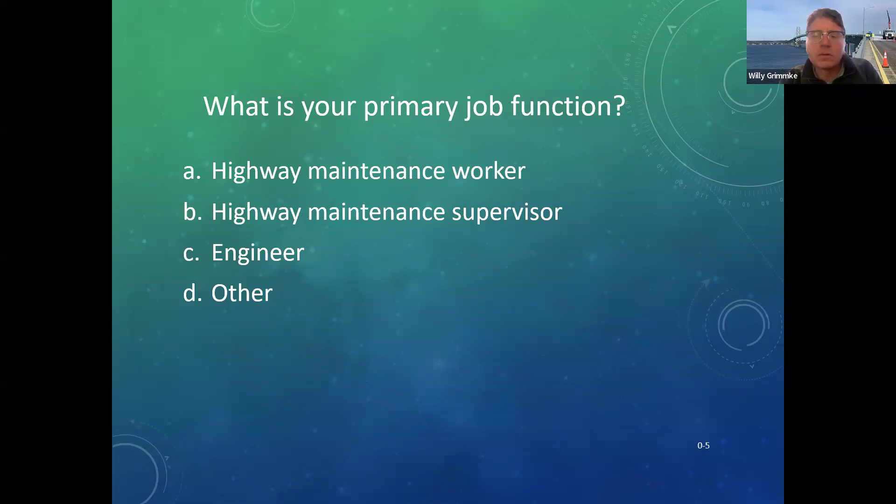So for the under 3 to 5 years folks, there may be something new that you'll learn. And for the people that are in the 11 to 20 range, you may have stuff that you can share with me that I haven't seen. Okay, we'll close that.

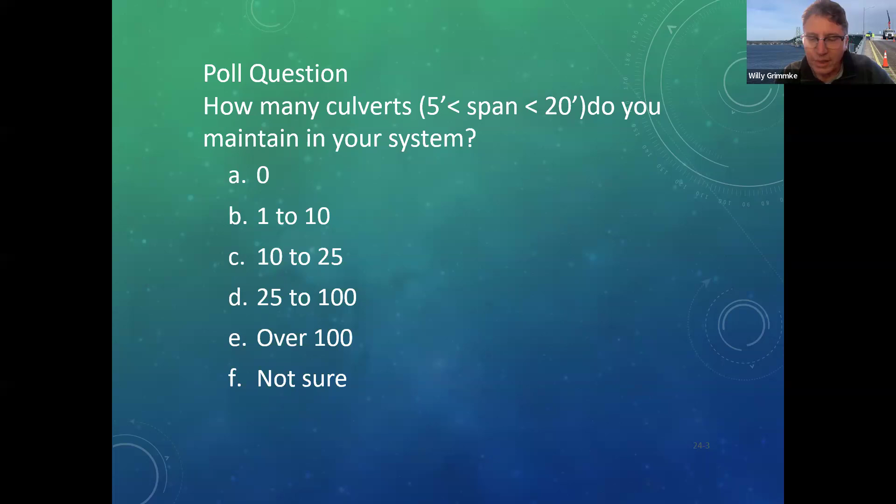If you have culverts in your inventory spanning between 5 and 20 feet, we're not talking small pipes. How many do you have and maintain if you're public or private sector stewards of infrastructure? All right Willie, we have a bunch saying over 100, couple saying not sure. Not sure is actually not an uncommon answer, because a lot of agencies know they have a lot but they don't know exactly how many. It's not uncommon to have a whole bunch.

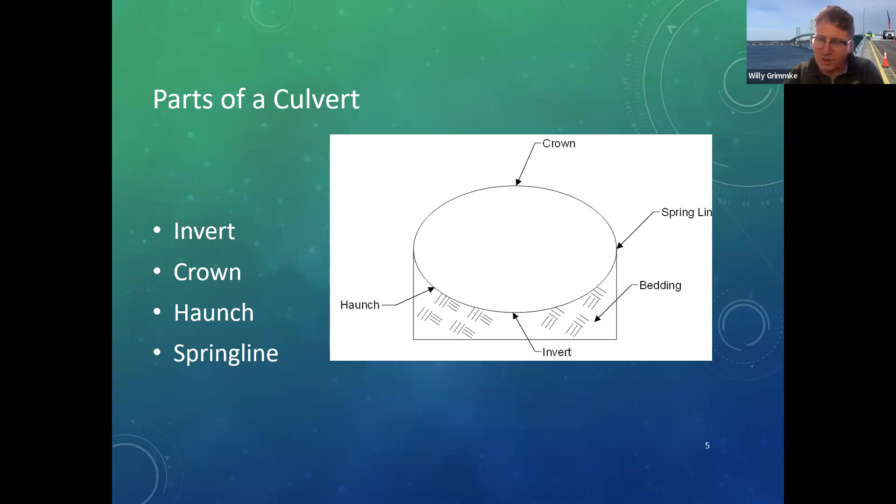Okay, so we're going to start with a little bit of nomenclature here. Parts of a culvert: the top is the crown, the bottom where the water flows is the invert. The widest part in an oval or round culvert is referred to as the spring line, and the area between the spring line and the invert is referred to as the haunch. We'll get into the importance of the haunch as we talk about flexible pipes a little bit.

In longitudinal section, sometimes we'll have an apron in front of our culvert to transition from the creek bed or waterway into the culvert itself. Sometimes we'll have a toe wall or cutoff wall to prevent or mitigate scour and undermining. We'll have the barrel of the culvert, which is the round wall part. We may have an end section, and we might have a parapet up above, depending on the length of the culvert and the road configuration and how high the embankment is above the culvert. We will often have joints, and sometimes we'll have wing walls.

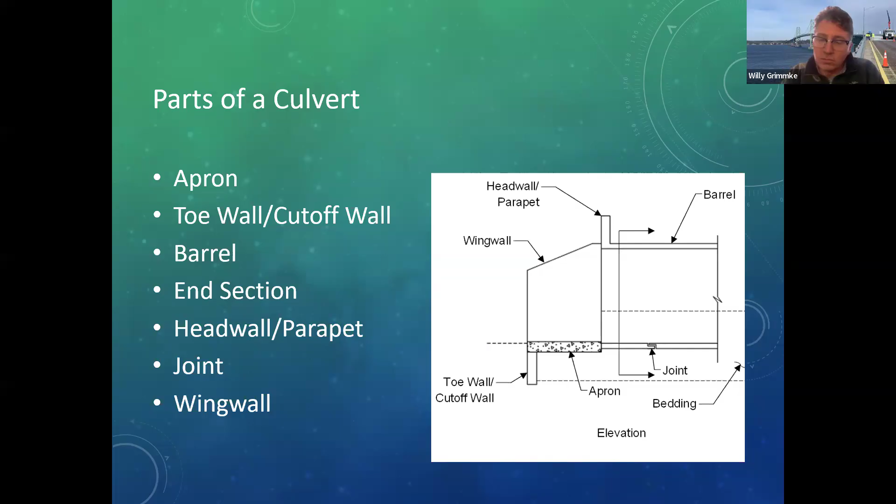Now, culvert materials. Common one is concrete, and concrete is rigid. It does not flex, it does not move. With round pipes, bedding is important. It has a smooth interior. If it's pipes, they're like 4 to 8 foot sections, so you'll have joints, and sometimes concrete pipes can be skewed.

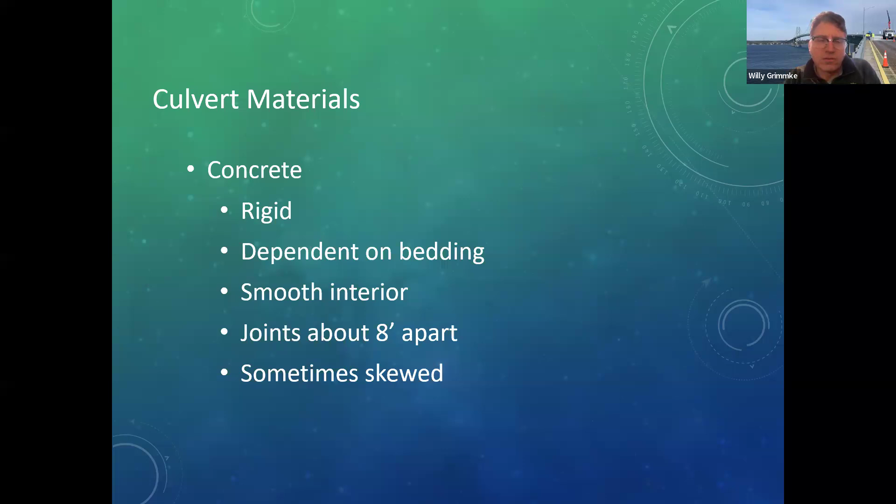It's very commonly concrete box culverts are being built for large culvert or small bridge applications. And concrete, you can have round pipes, horizontal and vertical ellipticals, arch.

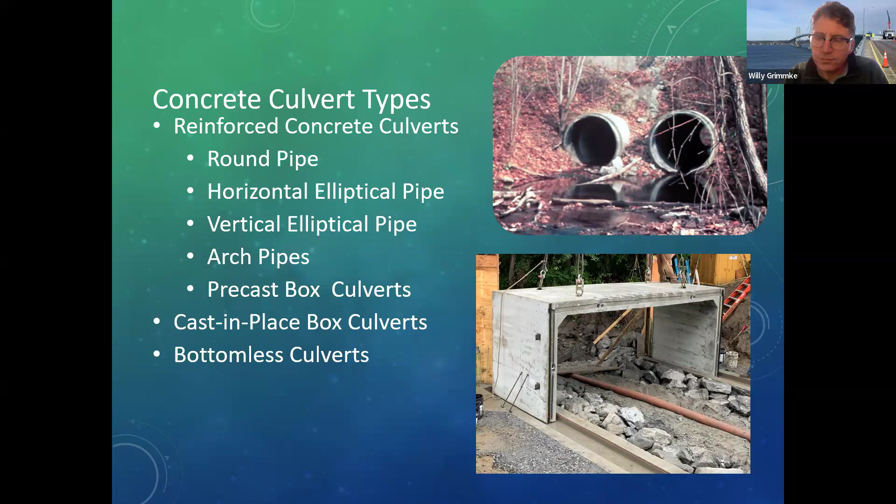Then we move on to flexible materials, corrugated metal. Corrugated metal is flexible, and much of the structural support is dependent on the culvert's interaction with the surrounding soil. To some degree, that flexible culvert is a form, and the compacted fill around it is doing a lot of the load carrying capacity.

With corrugated metal, because of the corrugations, it has kind of a rough surface, which in some cases can reduce your flow capacity a little bit. Corrugated metal pipes come in sections that are about 20 feet, although sometimes corrugated metal can be plate pipes or plate arches that are individual plates that are bolted together and have joints and bolts all throughout.

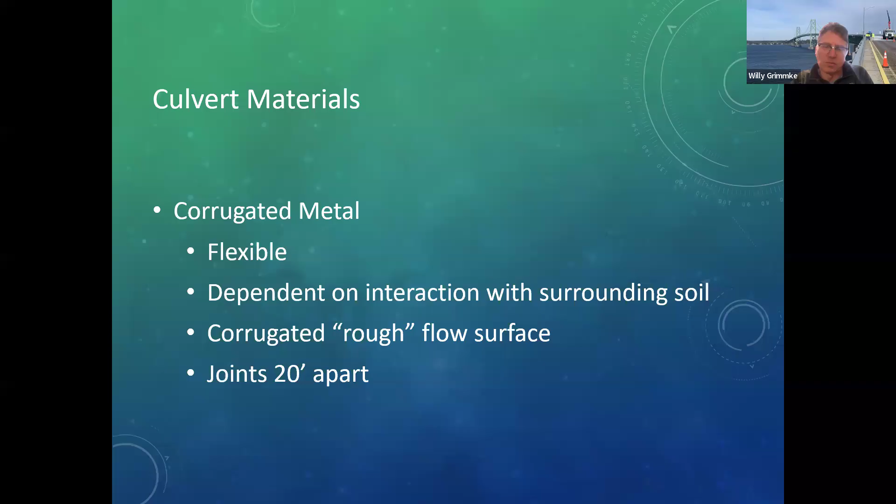The metal culverts can be steel or aluminum. Round ones come up to about 15 feet in diameter. Plate pipe arches, 50-foot spans, and we would use a fair number of those when I was in county government. Bottomless, up to 55 feet, and they are flexible. And as we show some of the distressed photos, you'll see the impact of flexibility.

Another type is polyethylene, plastic. Like the steel or aluminum, these are flexible, and their performance is dependent on interaction with the surrounding soil. You can get them with a smooth interior, which helps your hydraulic behavior. Joints are about 20 feet apart, and the nice thing about these is they don't rust.

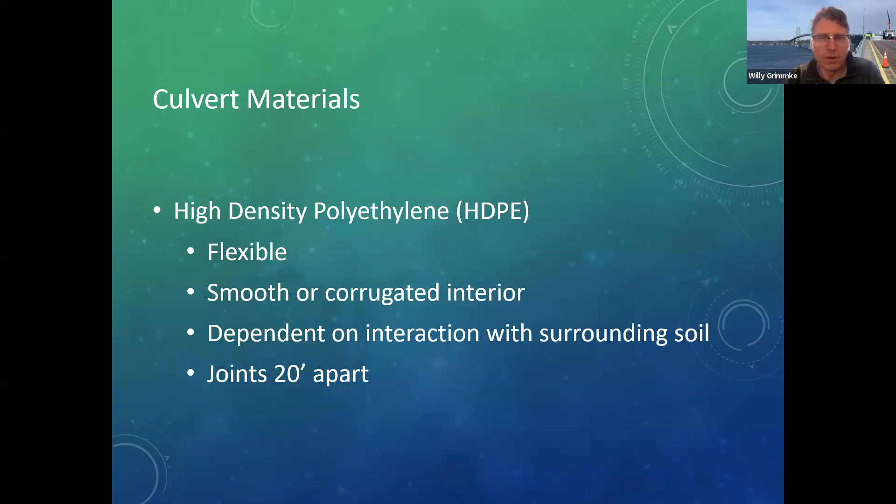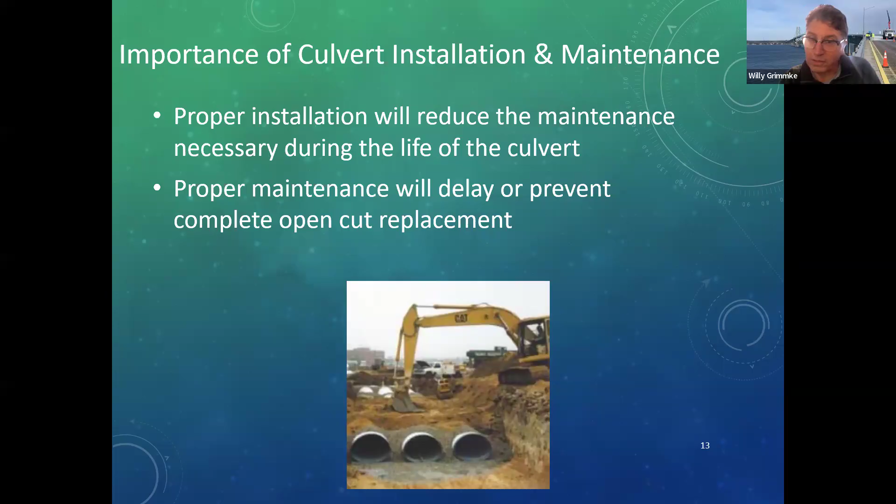It probably goes without saying, proper installation will reduce maintenance necessary during the life of the culvert. If you put it in right to begin with, it will probably last a lot better. And the key to proper installation, particularly with flexible culverts, is good compaction around the haunch areas while it's being installed.

So, common defects we get in culverts: we get debris and siltation. Our creeks and waterways carry a lot of stuff, and sometimes it accumulates. We get leaking joints. We get settlements and sinkholes, which aren't really a culvert defect, but they are a symptom of some other kind of defect. We can get scour and undermining at the inlets and outlets. For metal culverts, we can get damaged coatings. The inverts can be damaged or deteriorate over time. We can have localized damage. In concrete culverts, we can get cracks and spalls, and in flexible culverts, they can deform.

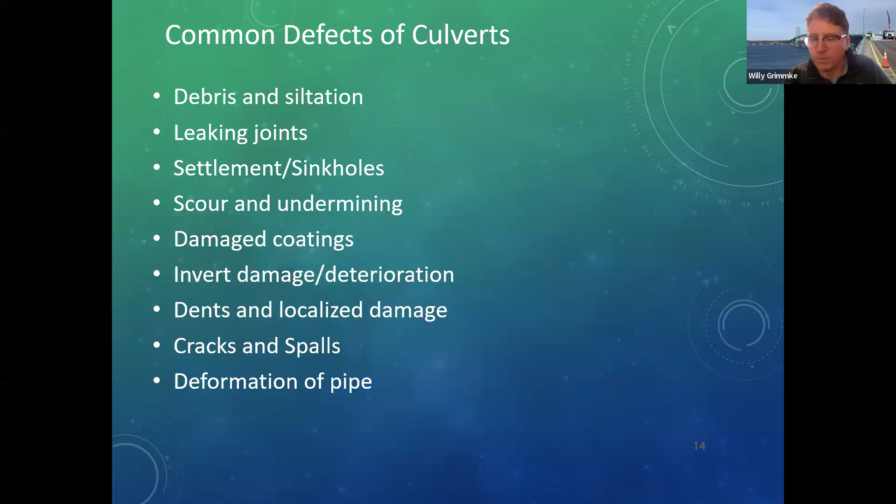So here's a photo of a twin arch, and we have a little bit of siltation, a little bit of vegetation growing on the silt bar, and this can reduce the capacity. Right now, in the photo, under a relatively low flow situation, all the water's going through one barrel, and the other barrel is largely silted up. If you look, you can see there's a little bit of scour in the barrel with the flow.

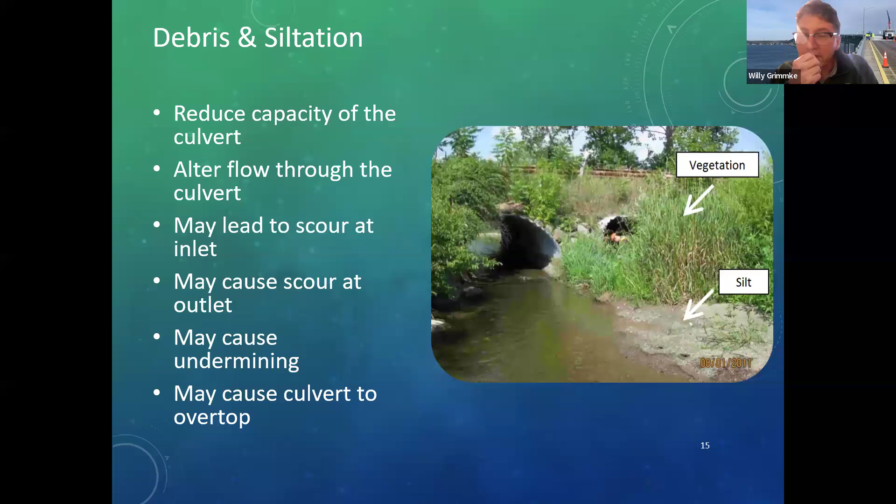If we get a high flow event, the culvert on the right isn't going to take a lot of capacity, and essentially the capacity of that has been largely negated, which could result in an overtopping situation.

Is it accretion from the stream, or is it failed joints, or is it some other mechanism?

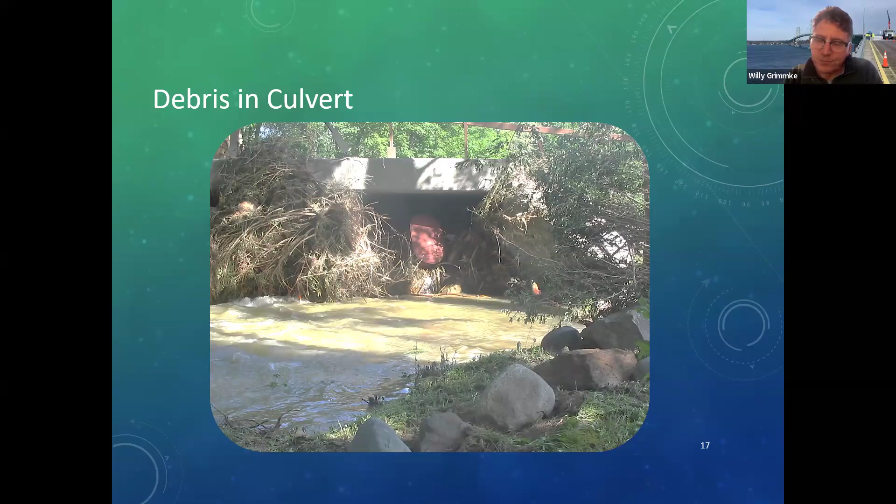Debris in culverts: if you get debris in culverts, it can cause a substantial reduction in hydraulic capacity. As you can see in this photo, there's a whole bunch of vegetation and a fuel tank stuck in this box culvert. Well, you get a bunch of debris in it, and it can cause overtopping, which can erode your embankment and approach fill, and that's what happened in this particular case.

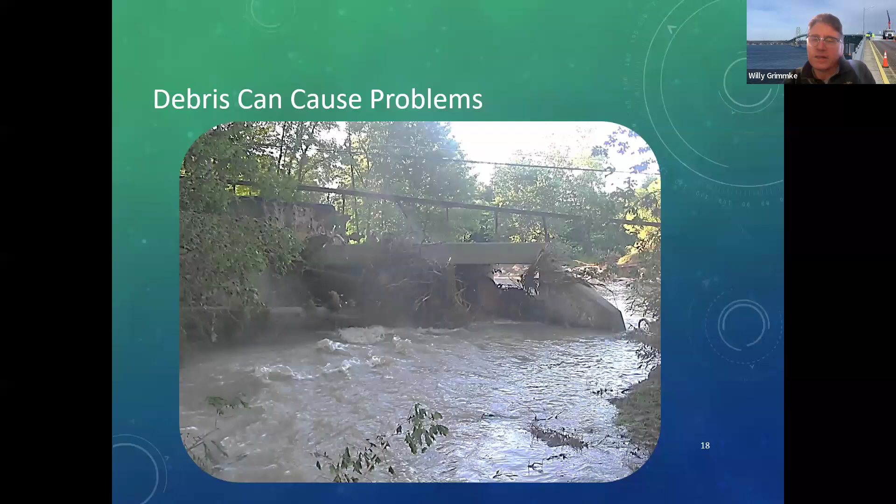Back in 2005, the Hadlock Pond Dam broke loose, and this was basically the result of that dam failure. Lots of debris and lots of overtopping.

So sometimes we'll have leaky joints, and they can be a result of a number of things. They may be separated or misaligned, which is what we see in the upper photo. There may have been damage during installation. In the lower photo, you can see the bell on that concrete pipe has a big chip in it.

They can open up. I was involved with a project several years ago where a culvert was placed under a fairly substantial fill, like 25 or 30 feet high, and the soils below it were clay. About a year later, we went out to do an inspection, and the joints had opened up because the fill above the culvert had caused settlement and caused joints to open up. Also, poor bedding and subgrade can cause joints to open up.

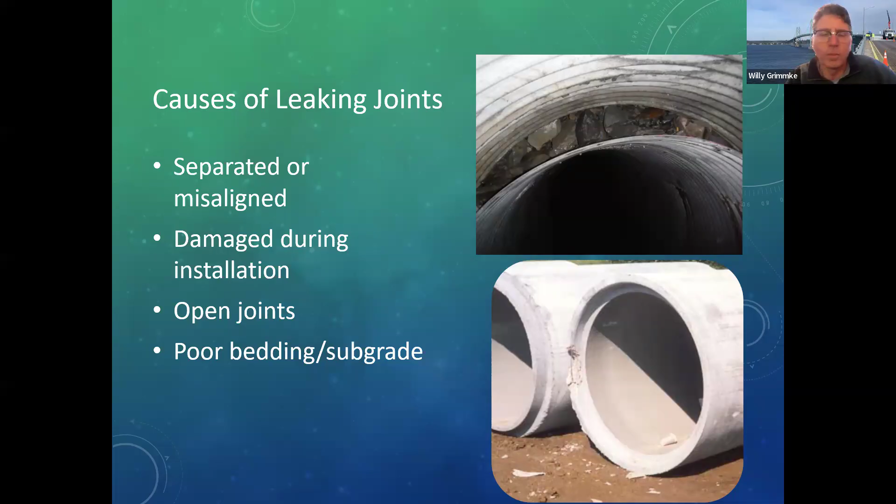Impacts of joint defects: water can infiltrate or exfiltrate, you can get soil coming in, you can get seepage. And if you have soil infiltration, what that can cause is sinkholes or erosion in the pavement surface above the joints, or down below it can destabilize the culvert.

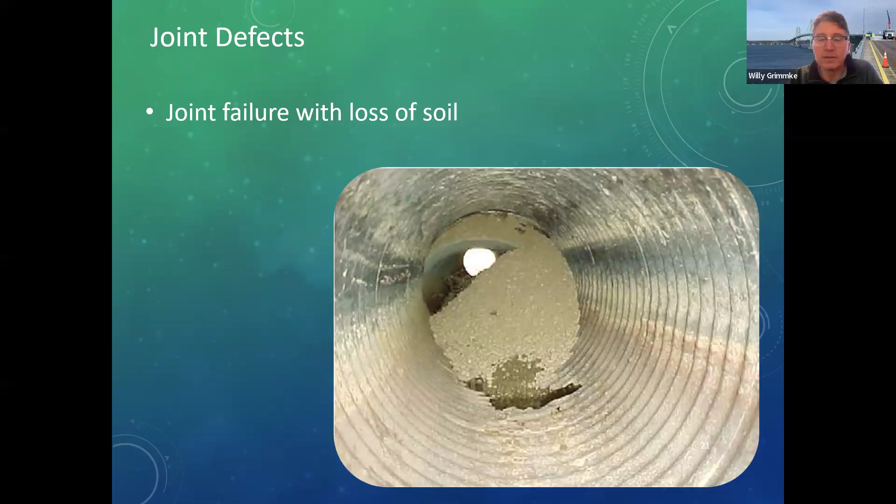Sometimes the distress caused by leaking joints isn't always readily apparent. This photo was taken about a month after this road was repaved. There was a mill and fill project, so the road was milled and overlaid. The paving contractor used a vibratory roller and got nice, good compaction on the pavement. Then several weeks later, the municipality noticed there was this little hole in the pavement.

They went out, stuck a ruler down, and it was some 4 or 5 feet deep. They dug it up, and it was like 4 or 5 feet in diameter. Apparently the old concrete pipe that was there did not fare well due to the vibration up above. It opened a joint up, and then with the subsequent rains over the weeks afterwards, caused that void in the pavement.

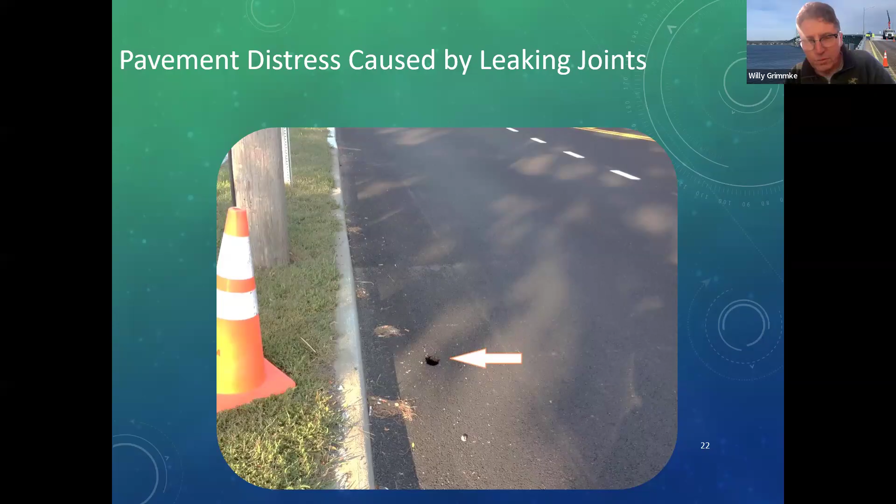We can also get scour at inlets or outlets. This is an extreme case, farther downstream from the other Hadlock Pond Dam outlet issue. The water had ponded or was impounded on the opposite side of this embankment, almost to the top, and it was rushing out like a fire hose and scoured out that entire bank. Again, extreme case, but it demonstrates the point.

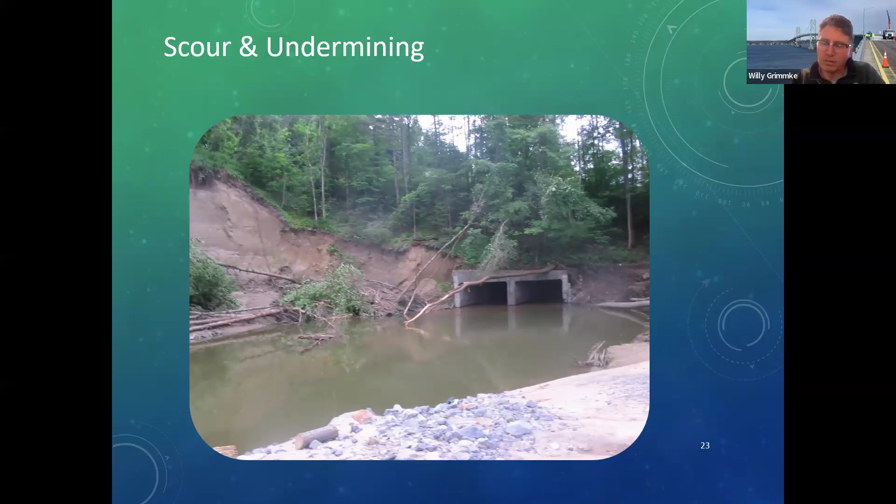I talked about deformation a little bit. Here's a plate arch, and due to either overload or installation or some other factor, this has a fairly substantial sag or belly in it that has happened over time.

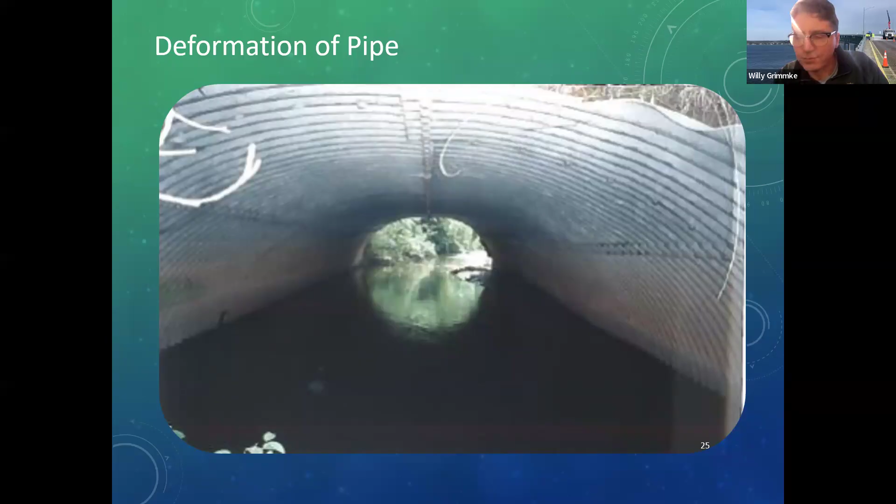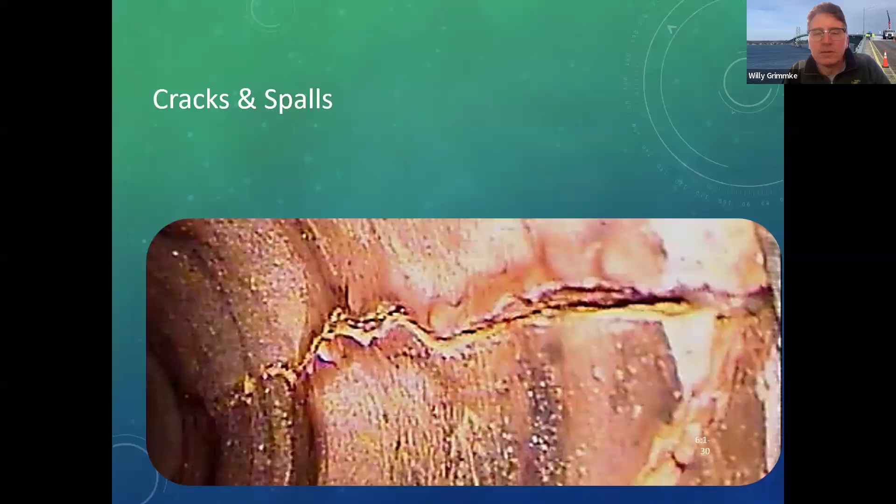If we have concrete culverts, they can exhibit some of the standard problems we have with concrete: it cracks, it spalls. If we take a look at what's happening with the cracking, what's the cracking pattern, it can give us a pretty good indication of what mechanism is causing the cracking.

If you have cracks at 12, 3, 6, and 9 o'clock, longitudinal cracks down the pipe, it indicates we don't have great side support and the pipe is crushing. If you have cracks down at 5 and 7 o'clock longitudinally on either side of the invert, it indicates the haunch area wasn't properly compacted. And if you have good side support all the way around, we shouldn't have cracks at all.

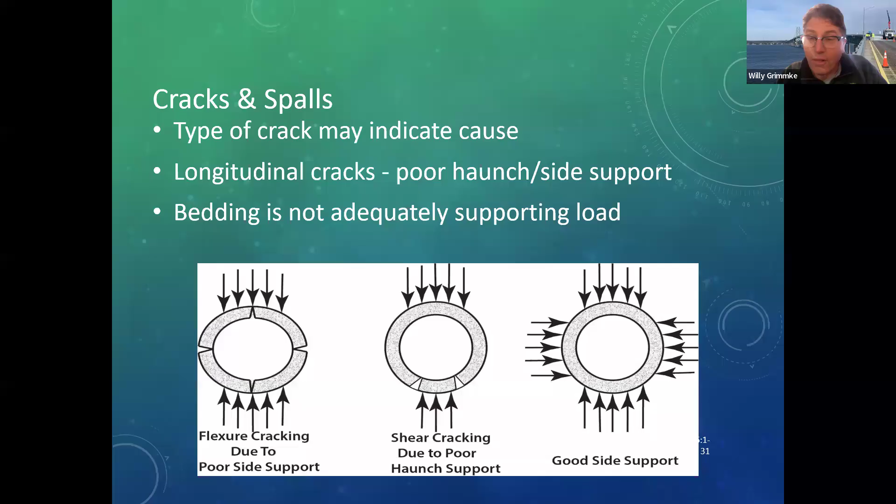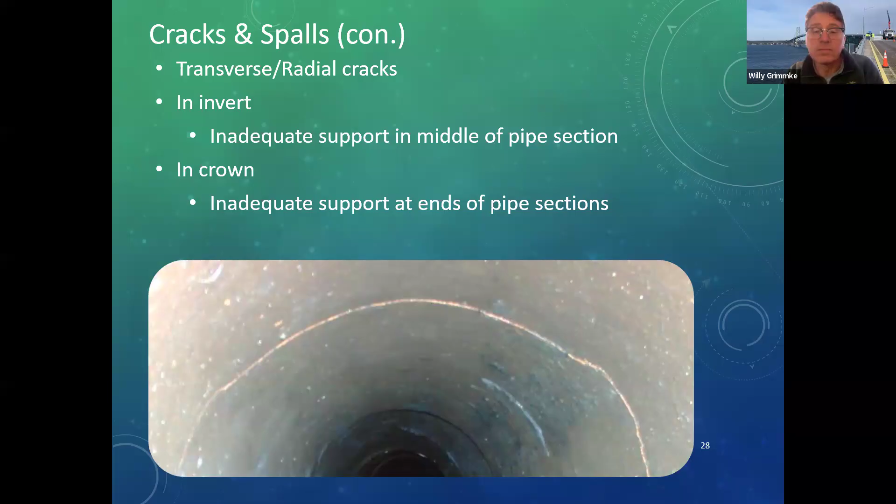Now, if we have radial or transverse cracks, it indicates inadequate support at either the middle or end of the pipe sections. Looking at this photo, if you've got proper bedding, the pipe is uniformly supported end to end. If you have a broken back or cracks up in the top, it indicates the ends are not properly supported. And if you have radial cracks that are open in the bottom, it indicates the main barrel is inadequately supported, but the ends are.

And we move on to metal pipes and coatings. Most of our corrugated metal pipe is galvanized steel, and the galvanization protects the pipe for a period of time from corrosion. As that galvanization goes away, we have a question in the Q&A.

Question: what are your thoughts on when to use number 2 stone versus rubble or crusher for bedding and backfill of culverts?

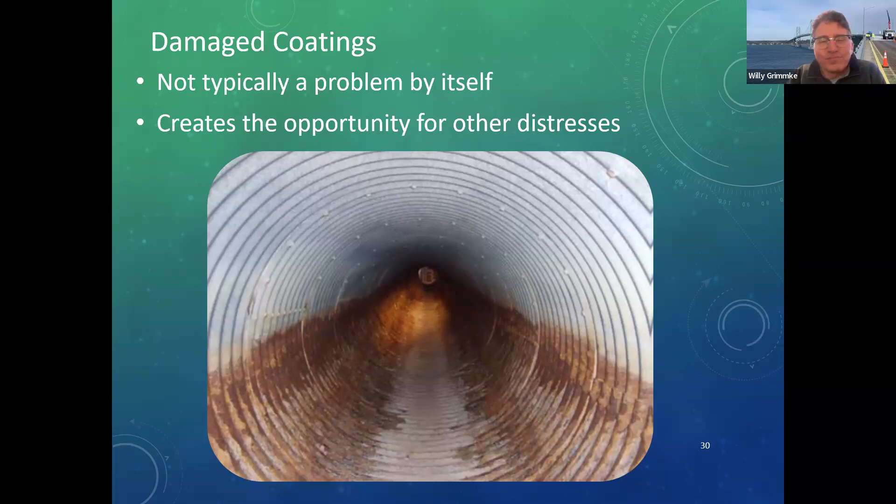Corrosion, how and when it starts, is usually in areas that are either completely submerged or right at the normal water line where there's that good combination of oxygen and water. It usually starts with pitting, and you'll get these little pits or rust nodules, and then they'll break off.

Water and soil chemistry tend to accelerate this. If you have acidic or saline water, you tend to get corrosion more quickly, and soils with low electrical resistivity tend to corrode metal pipes more quickly.

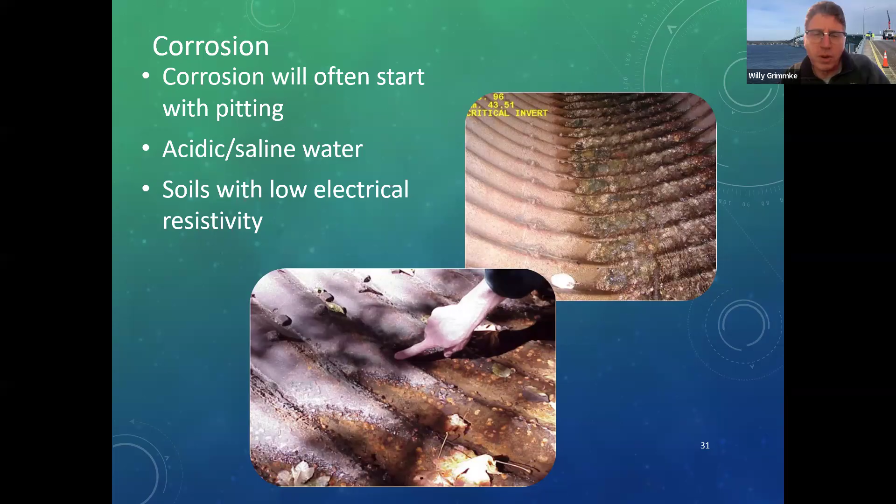You can get invert deterioration also caused by a couple of things, either abrasive bed load - you've got a bunch of sands, gravels, high velocity washing through the invert of the pipe and essentially abrasive blasting your invert. In some situations, the water chemistry may cause deterioration also. And as the invert weakens or gets reduced in section, it may destabilize the culvert.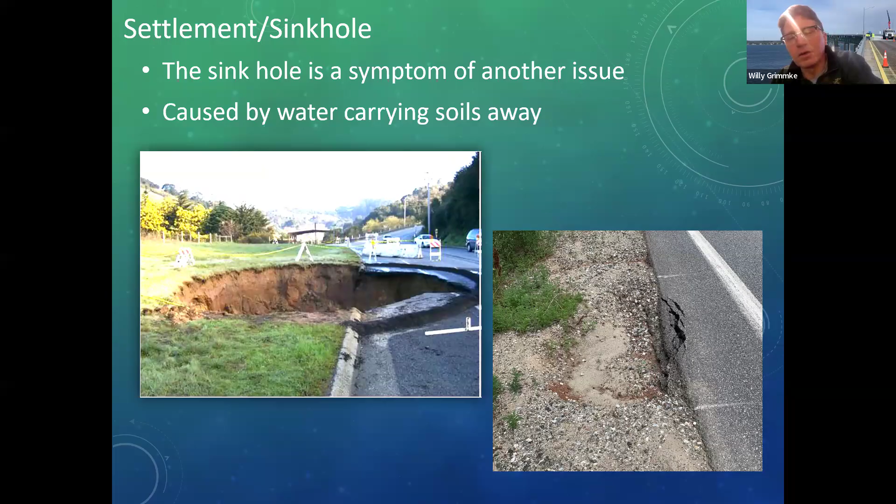Now, sinkholes. I believe this photo was taken in California, and it's not of the culvert, but what it indicates is the culvert has a problem and the soil around it was washed away. So sinkholes are a big symptom that you have a problem. And it could be much more subtle, like the photo on the right.

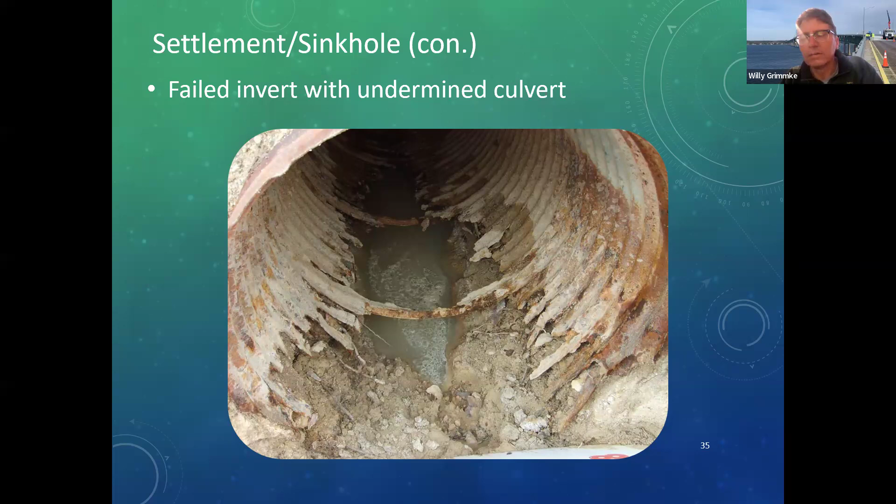And in time, you may get inverts that completely fail. Then you have scour underneath and the culvert being undermined. You may have inadequately supported or overloaded culverts that in time collapse.

So what do we do to keep our culverts performing well? Well, things we can do are remove debris, sediment, vegetation, so they will continue to perform like they need to. We can also armor the inlets, outlets, and embankments for scour and erosion protection.

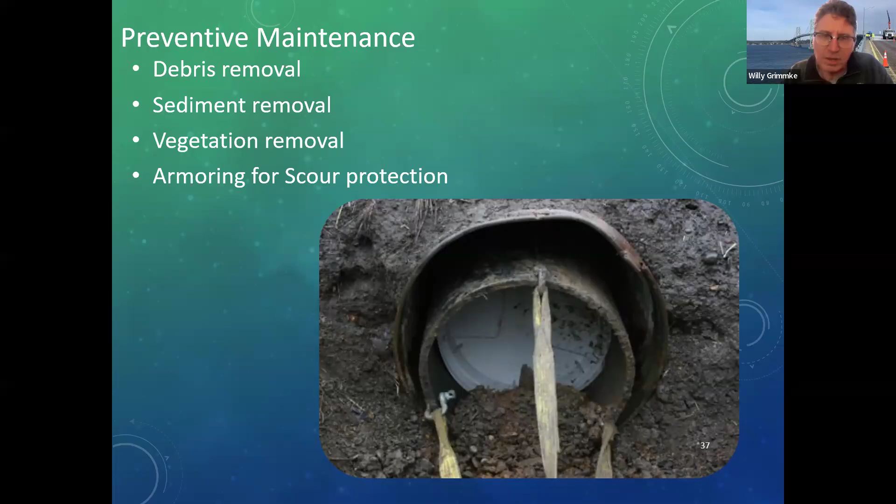So the method of removal of debris or silt will depend on what you have. The vac truck is not going to remove the livestock gate that's stuck in this culvert, but it could be effective for getting the silt out. You're going to choose the tool you need based on the type of debris, the size of the culvert, the access, and if you have any environmental restrictions and what those are.

Do you have to contain silt and debris, or is it the time of year when you're out there working where everything's dry, so it's not a concern? You have health and safety concerns. Is that culvert a confined space, and are you putting people in a confined space? What's the water like? Are there contaminants in it?

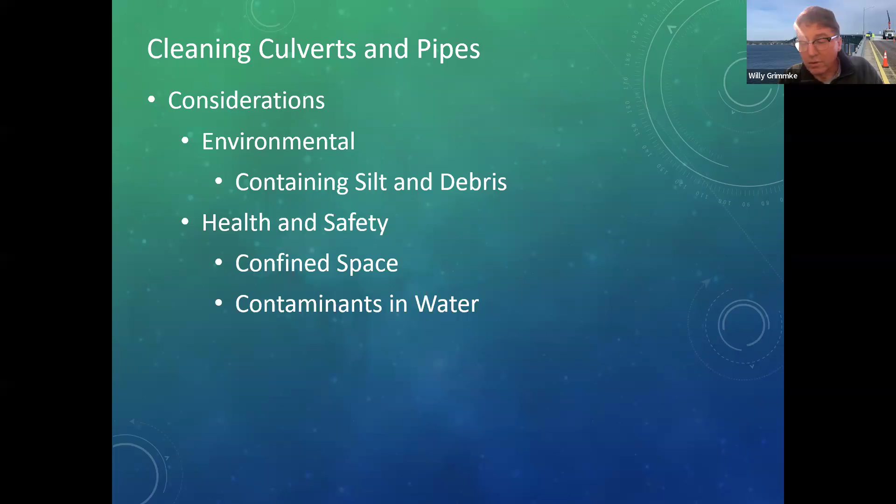If we have large debris, like wood, logs, beaver dams, etc., typically at the inlet and outlet, can you use an excavator with a grapple on it or other large equipment? Cables with hooks to hook on and pull it away. Do you need to put somebody in the culvert? Can you get a skid steer in there? Variety of tools to choose from, but again, you need to be conscious of what's safe and what's environmentally sound.

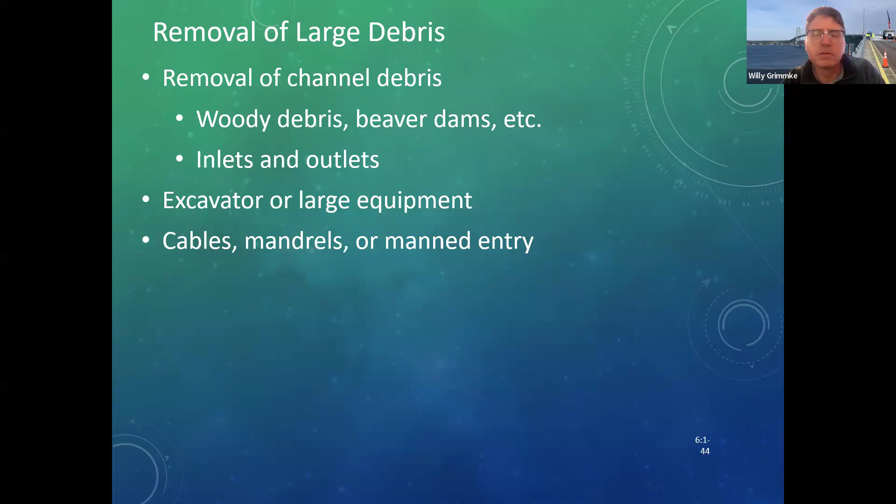If you've got silt, vac trucks work great, if you've got enough hose. Bucket line, small skid steer, fire hose, water jet or sewer jet - water jet, sewer jet, and fire hose are great, but you need to do some sort of recovery or collection so you're not putting silty water downstream. And a word of caution on the sewer jet is if you've got a corrugated pipe with open joints, that could make the open joint situation or the perforated invert problem worse.

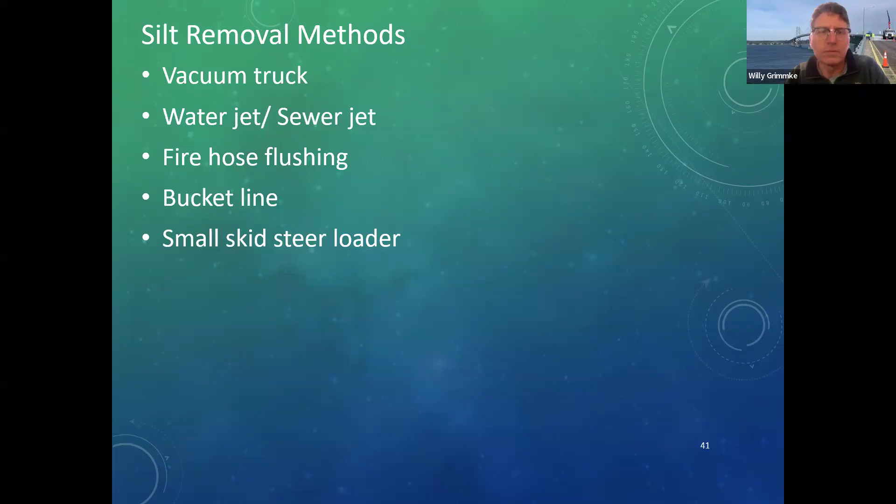So if you have scour, how you do it will depend on the severity of it.

You'll want to do a hydraulics analysis to make sure you're using the right material. If you've got a 5-foot diameter culvert with relatively low velocity flows, heavy stone fill will probably be overkill. But if you were using number 2 stone, it may all get washed downstream. So you want to pick the right material. Variety of strategies, you can use grout or geotextile.

If you're working in the stream, you will need to make sure you have the most appropriate environmental permits in place and comply with those.

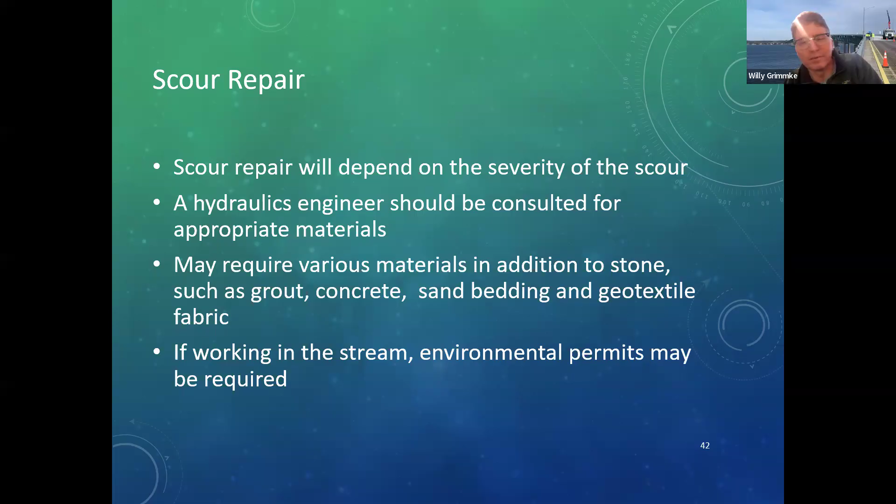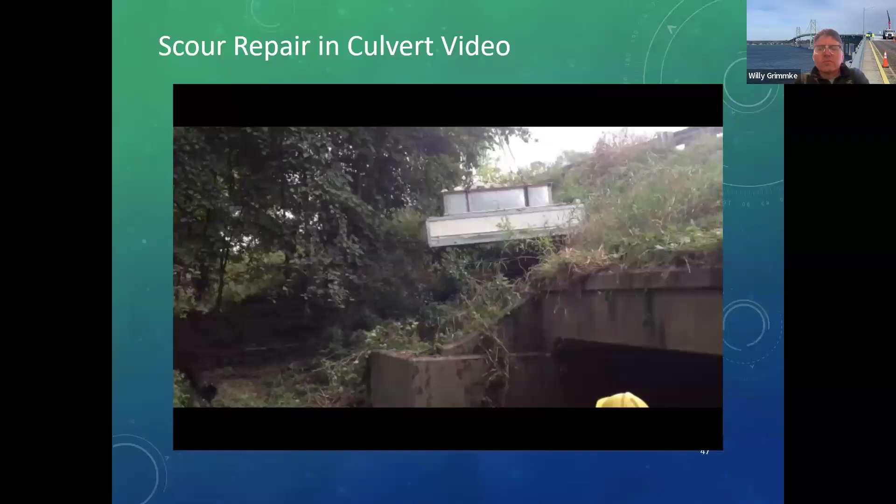Okay, this is a video. Michigan DOT had bottomless culverts, and they had scour along the footings, and this is what they devised to get riprap down along the toe of that footing for scour repair. This basically floating box is full of riprap, it's like heavy stone fill.

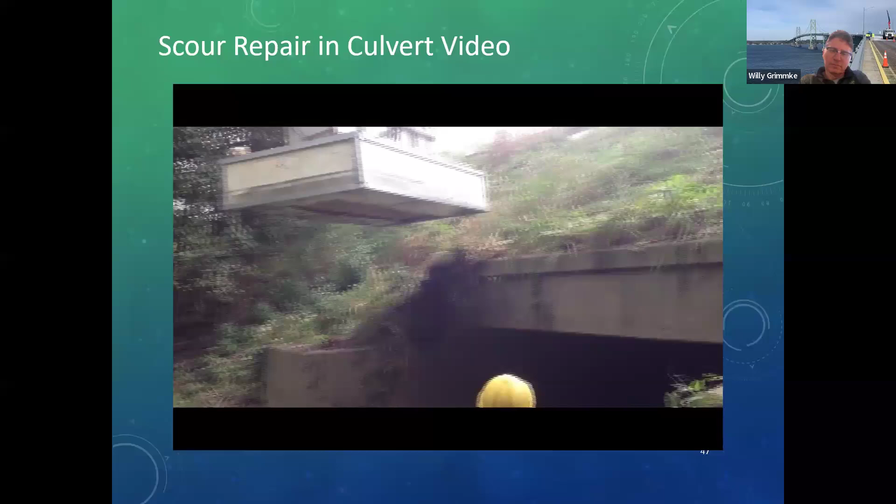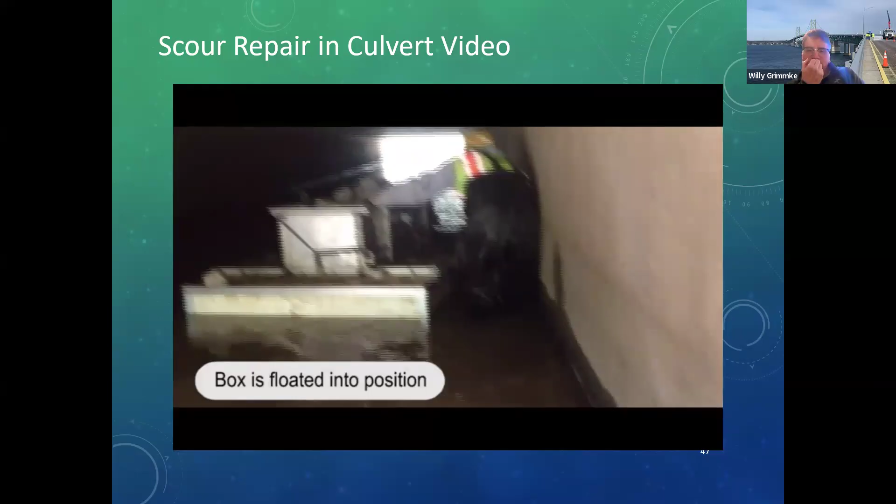And they're lowering it down into the waterway with a crane, then floating it into position where they want to drop the material, and then dropping it right there. Fairly ingenious.

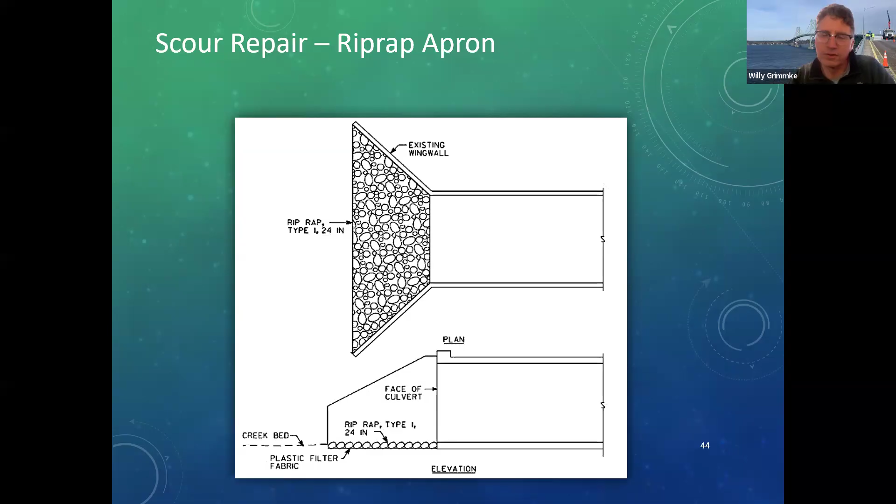Sometimes for scour repair, you could do a riprap apron. This is a Georgia DOT detail, they use a 24-inch, their type 1 riprap. In some locations, a concrete apron to transition from creek bed into the culvert may be appropriate.

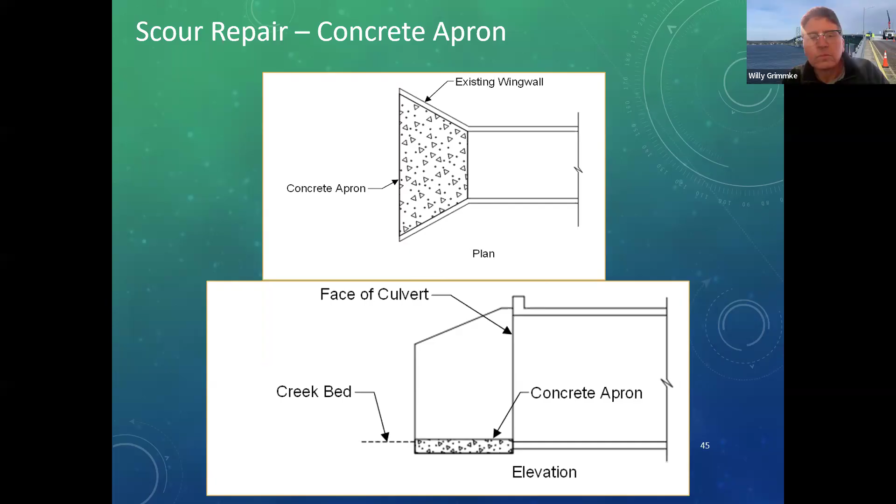So now we get into repairs. If you have undermining, how do you repair it? If you have inverts, how do you repair those? And what do you do for joints, footings, and relining?

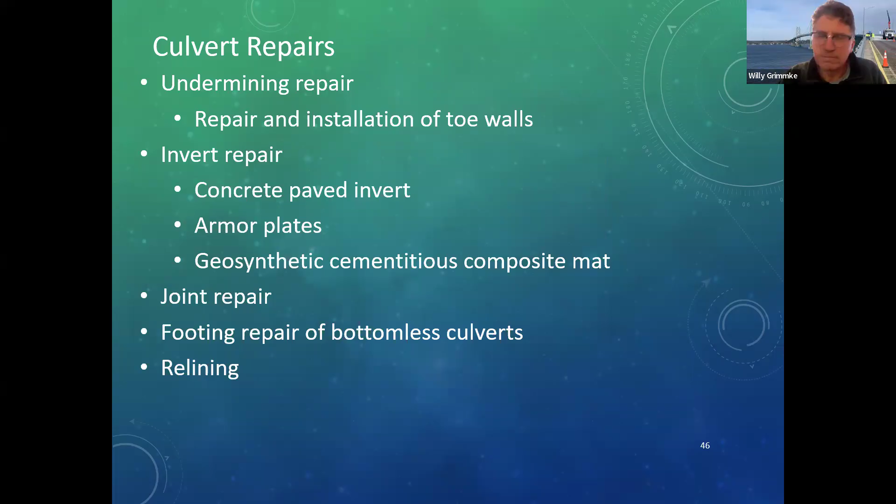So undermining repair. One of the things you can do is a cutoff wall, and it will prevent or retard undermining from happening, provided the cutoff wall is deep enough. It won't prevent the scour hole in front of the culvert, but it'll keep it from progressing beneath it.

Another question says, can you re-sleeve it? We are going to get to that. We're going to talk about relining in a little bit later.

So to construct a toe wall or cutoff wall, basically you need to dewater. You need to make sure it's adequately designed so you're down below maximum potential scour depth. Form anchored to the existing culvert, place, cure, backfill, restore the stream.

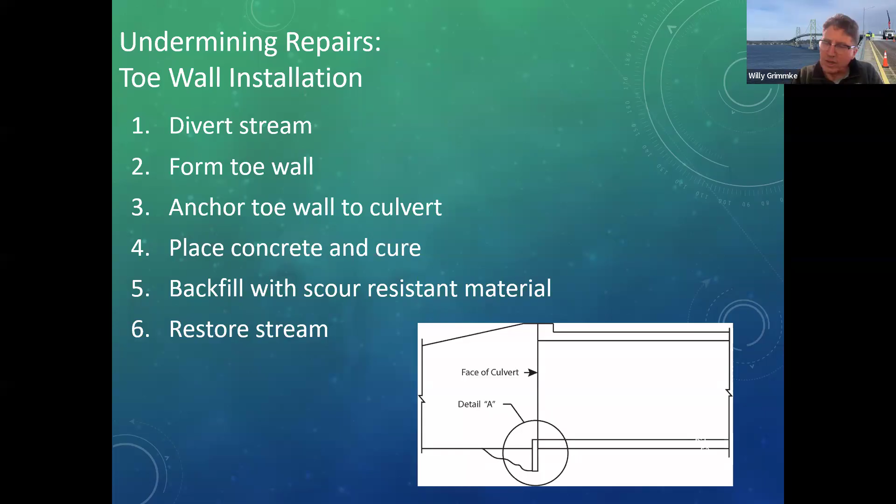If you have invert problems, like we saw in some of the photos where the invert was heavily perforated, gone, non-existent, etc., but the rest of the culvert's in good shape or basically intact, you can do invert repairs. We can do a concrete paved invert, we can do armor plates, we can do geosynthetic cementitious composite mat.

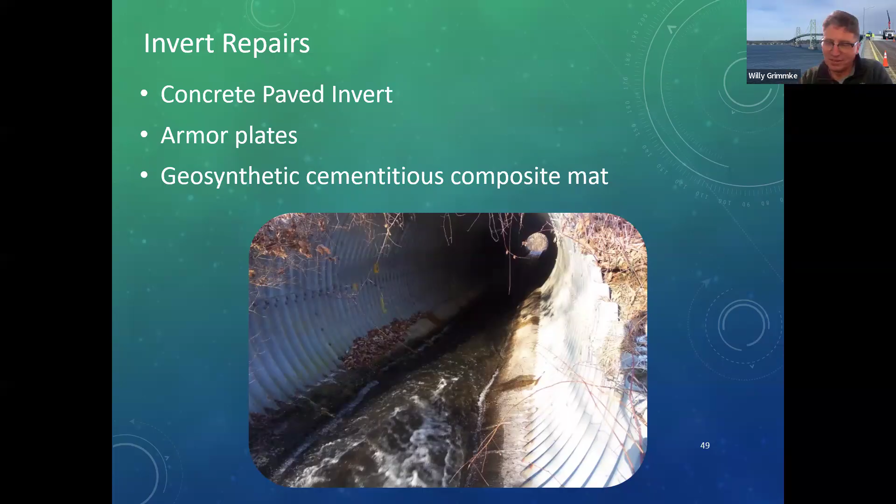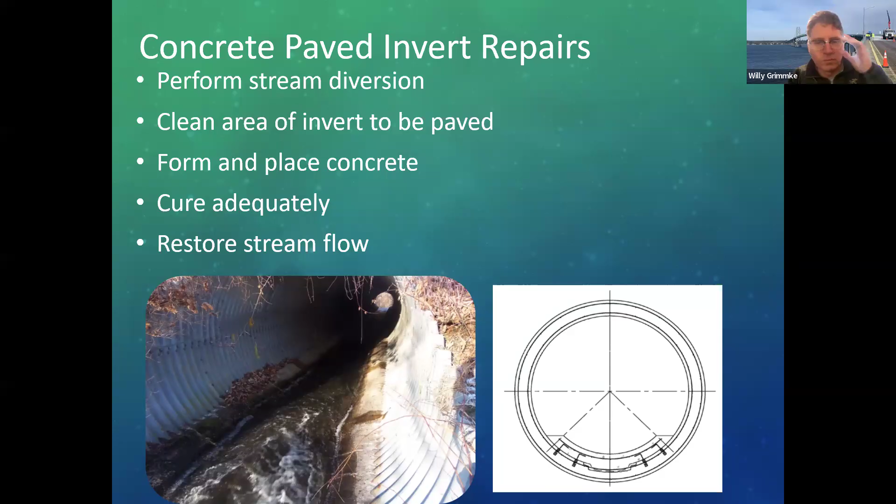So here's a photo and diagram of concrete paved invert. Does require stream diversion, the area of the invert needs to be cleaned. If you have any undermining or perforations, those need to get filled. Concrete is formed and placed, cured, and basically in the photo you see there's a new concrete invert in the bottom of that metal pipe. That's New York State DOT did that with their own forces on Route 29 in Washington County.

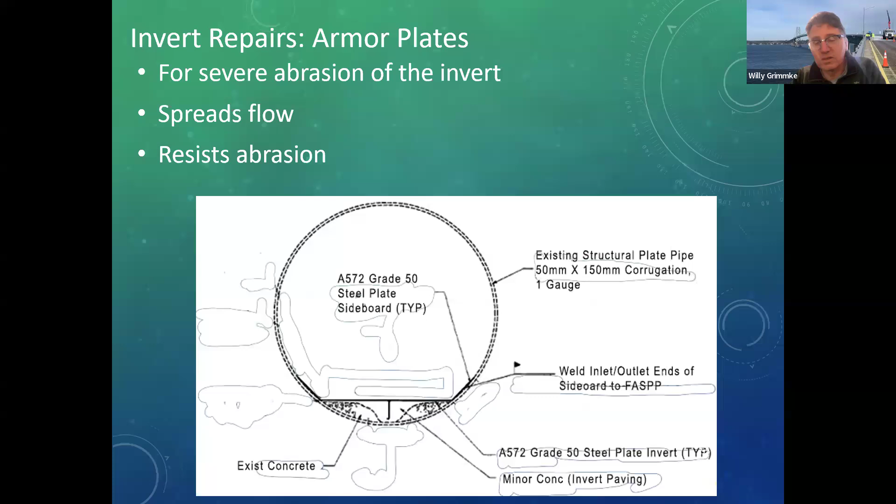And then, concrete is placed or grout below the armor plate. Geosynthetic cementitious composite mats, basically what this is, it's a sandwich of geotextile with a concrete cement mortar uncured in it.

Virginia DOT has been using this, and you dewater the pipe, you roll it out. Depending on the width of the invert that you're doing, you can either longitudinally roll it out or do it in a shingle pattern as shown in the photo. Hydrate it, basically spray water on it, allow it to cure, and then restore your stream flow. And then you've got this concrete and geotextile sandwich that's protecting your invert.

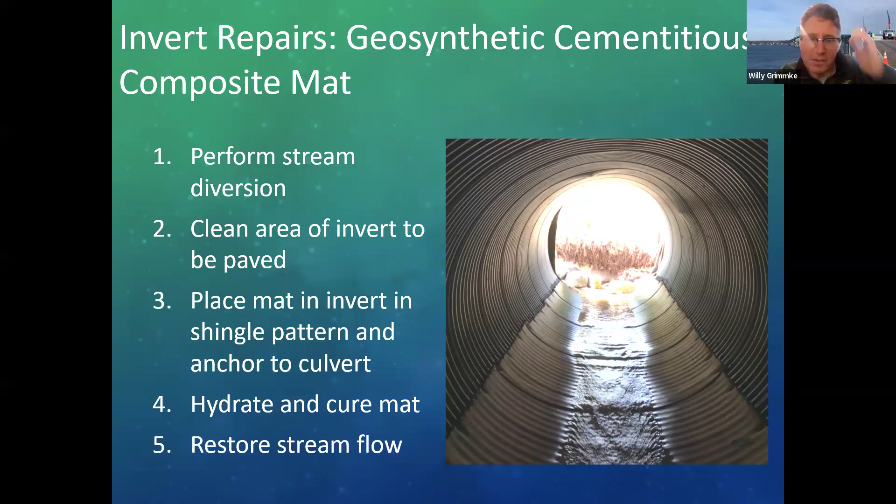If you have joints that are separating and going bad, there are methods to repair those. You can use internal bands, internal joint seals. You can do flexible grout injection or concrete collars.

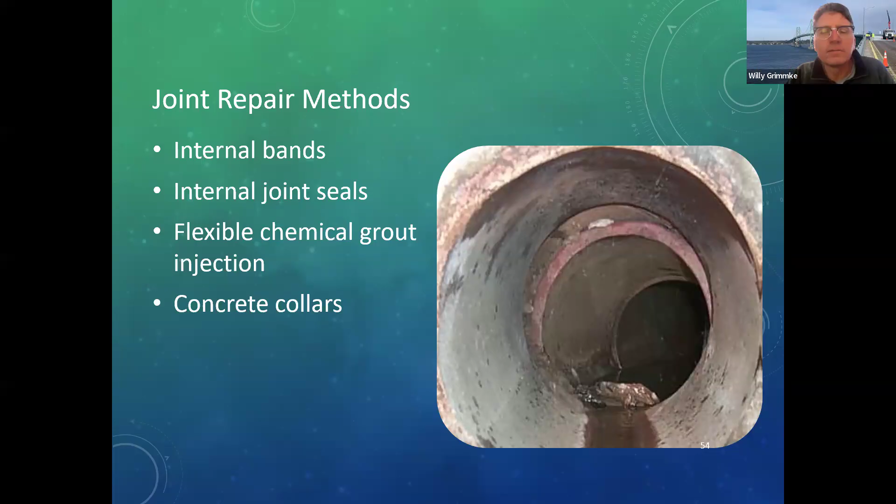These are internal bands, and this was on a reline project, but internal bands can be used in some applications for existing pipes if the joints are separating or leaking, but not misaligned too badly. These internal bands are soil tight, not necessarily watertight, and the bands are placed over the joint and they are tightened into place with threaded rods.

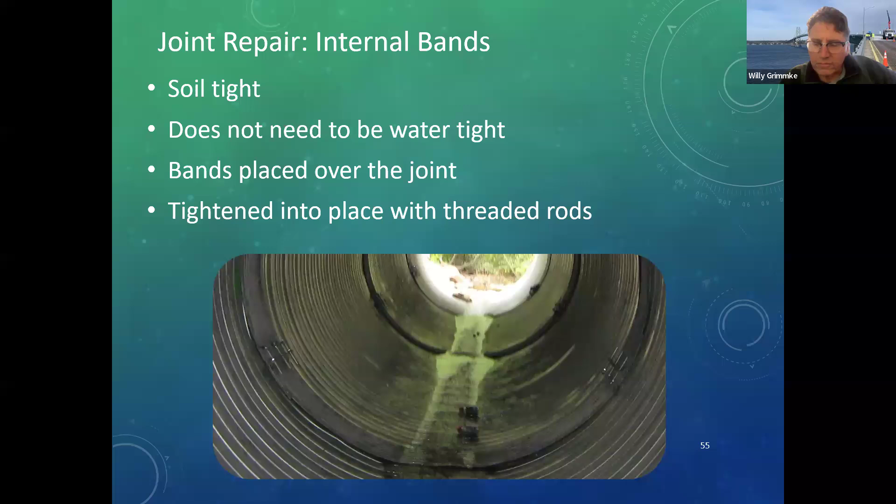And you can see the threaded rods at about 4 o'clock and 8 o'clock positions. Now, the challenge with these is if you have a culvert or a waterway that carries a fair amount of debris, these can be a snagging potential and can catch debris under higher flow situations. So just be aware of that if you're using this method.

Flexible chemical grout injection, it may be the foam, it may be cementitious grout, and that can get injected into the joints. I had mentioned the project where the joints opened up because of settlement, and on that project we used a grout foam injection into the openings, and that seemed to have sealed everything up and prevented the joints from leaking and losing soil into that culvert.

If all else fails, and you have to go get out the more intense, destructive, big gun kind of things, you can do a concrete collar. This isn't done from the inside - you have to excavate around it and basically pour a concrete collar beneath and around it, encasing the whole joint to seal it up. This is a Florida DOT detail, but the challenge is you have to excavate.

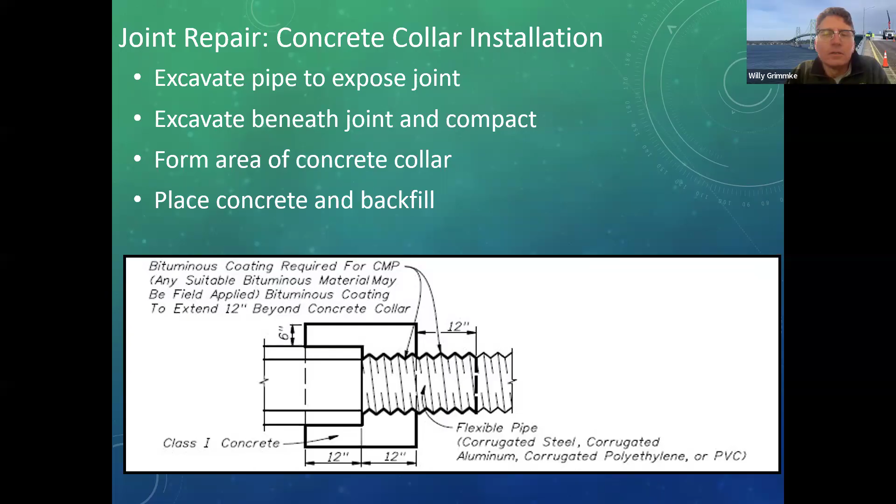Now we get to the relining part. Yes, you can reline your culverts if they're not too badly shot or too badly misshapen. The options for relining are slip lining, where you slide a new slightly smaller diameter pipe or culvert arch through, shotcrete or spin casting with concrete, or cured-in-place pipe.

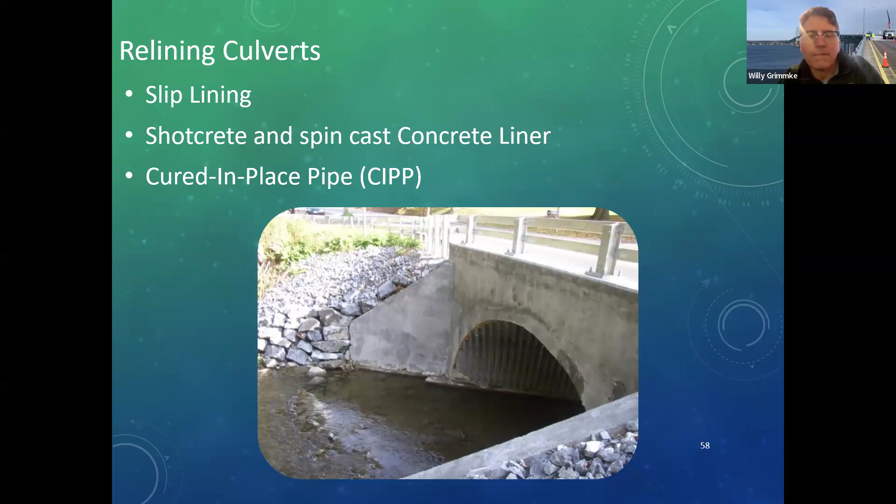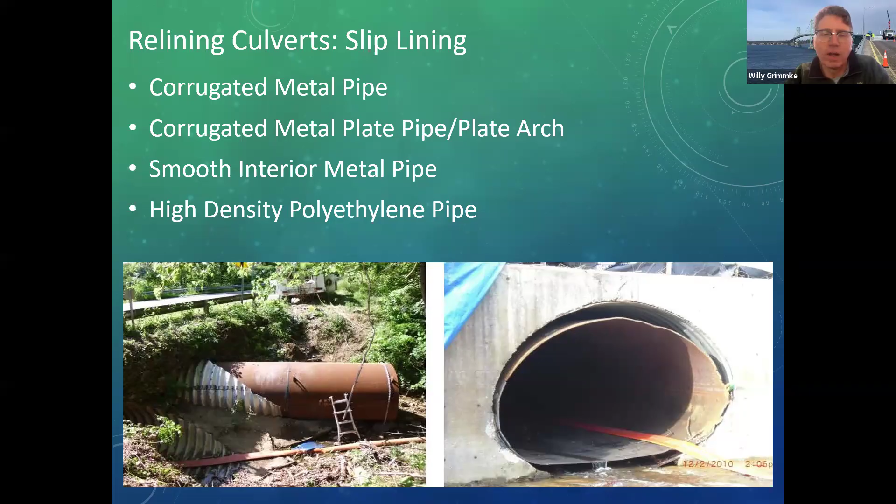For slip lining, you can use corrugated metal - round corrugated metal pipe, corrugated metal plate pipe or plate arch, smooth interior metal pipe, which is what you see in the photo, or high density polyethylene plastic pipe, both smooth interior corrugated and smooth interior solid poly. This is a series of photos from when I was working with Washington County, where we had a corrugated arch that had failed or was failing at the water line, and we did a reline.

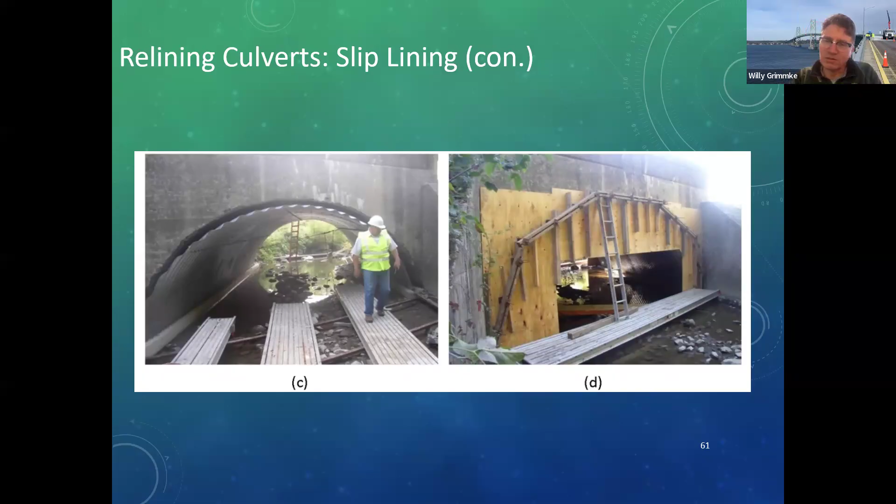The footings were fine, and we didn't want to close the road for an extended period, so we prebuilt this arch and slid it into place to reline it. Photo C shows it in place, and the area between the liner and the old pipe was filled with concrete. Photo D shows the forming it up, which was a little challenging because it was askew. This shows the interior formwork, and there was a fair amount of carpentry involved to make sure we weren't leaking grout all over when we filled that annular space.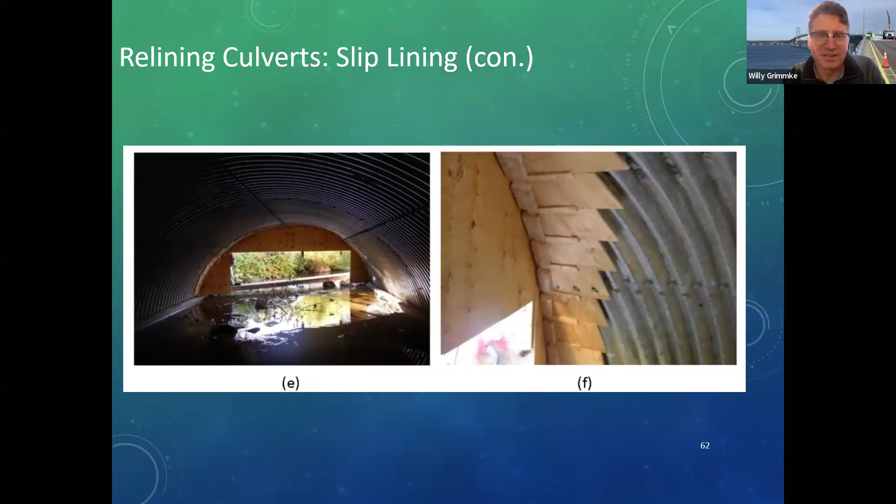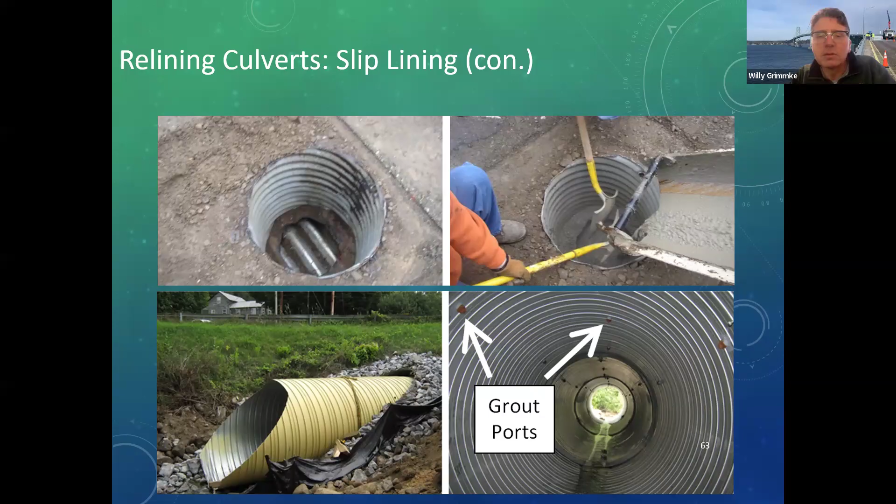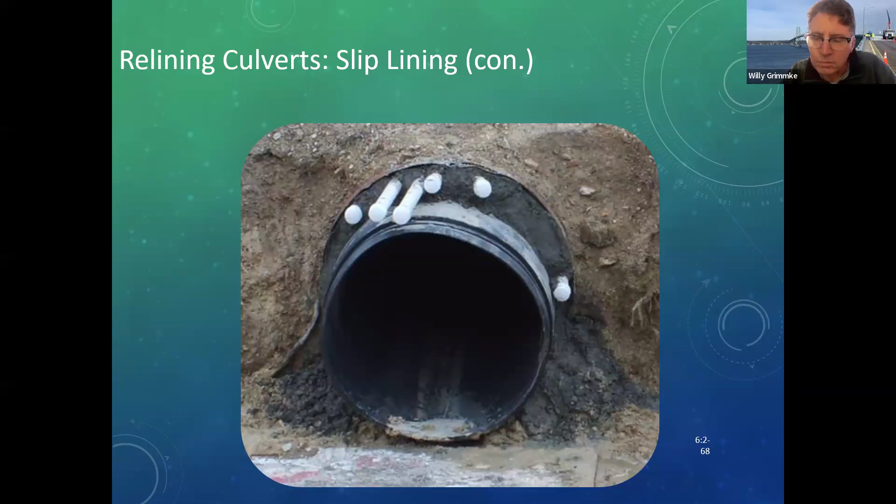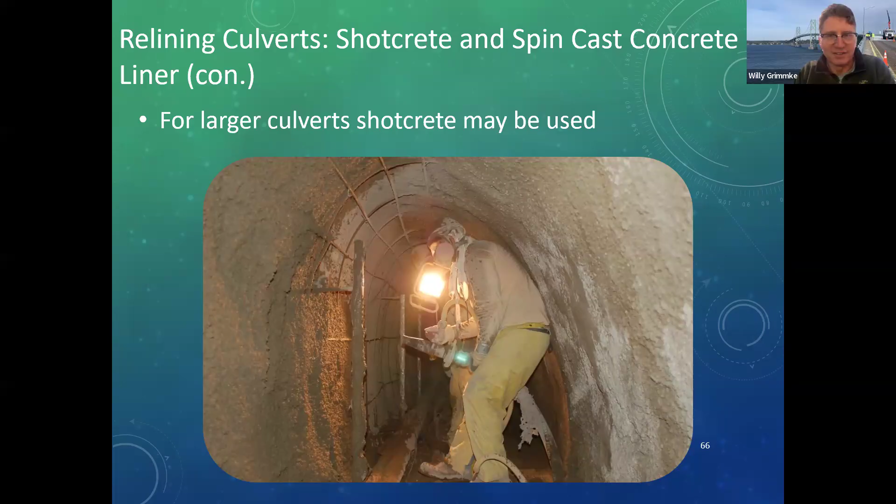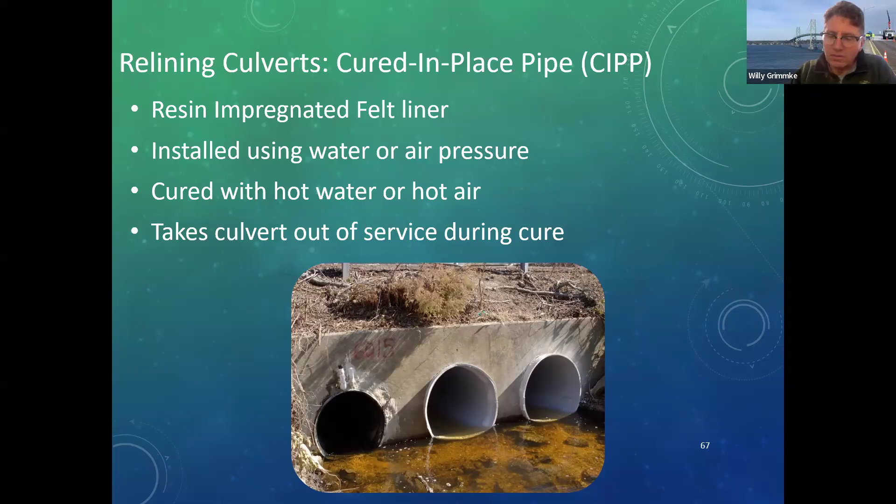Another possibility is cured-in-place pipe. This is a resin impregnated felt liner - basically a polymeric felt impregnated with an epoxy type resin. It's inserted into place and inflated either with water or hot air to push the liner against the existing host pipe, and then it's either steam or hot water cured.

Another question - what criteria is used to determine whether to reline versus replace?

Cost or feasibility. If you're under a 60-foot fill and you're going to have to close the road for weeks to excavate that all out and put a new pipe in, it's probably going to be more economical to do a reline, if you can feasibly maintain the hydraulic capacity you need with the lined condition.

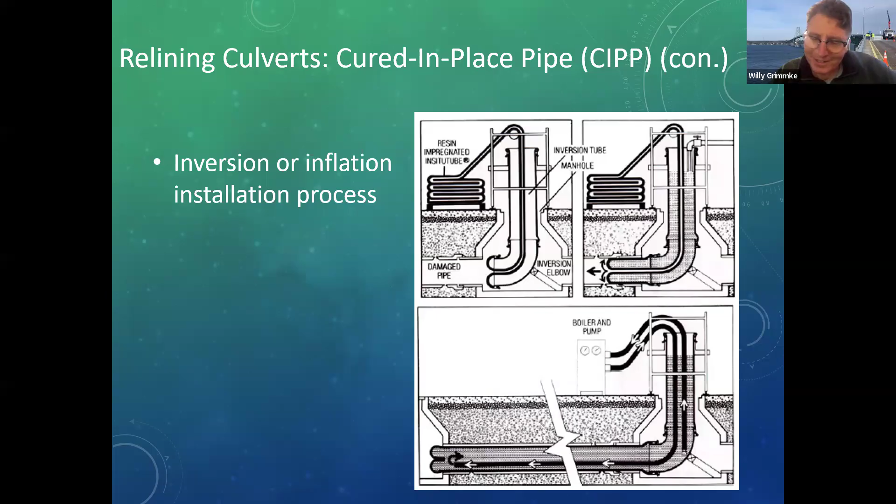Is it still going to be as strong as the original pipe? In some cases, stronger, depending on what you choose. Perfect, that is it for now.

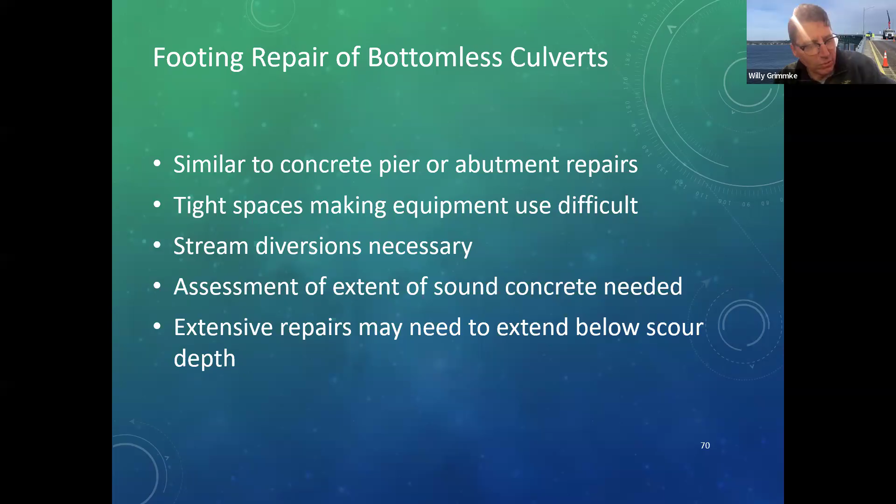So footing repair of bottomless culverts. We got a lot of bottomless culverts. This is basic concrete repair 101, but the challenge is stream diversions, working in tight spaces, and trying to get to the extent of where your deteriorated concrete is and getting all the unsound concrete out. Sometimes you need to extend those repairs well below scour or potential scour depth.

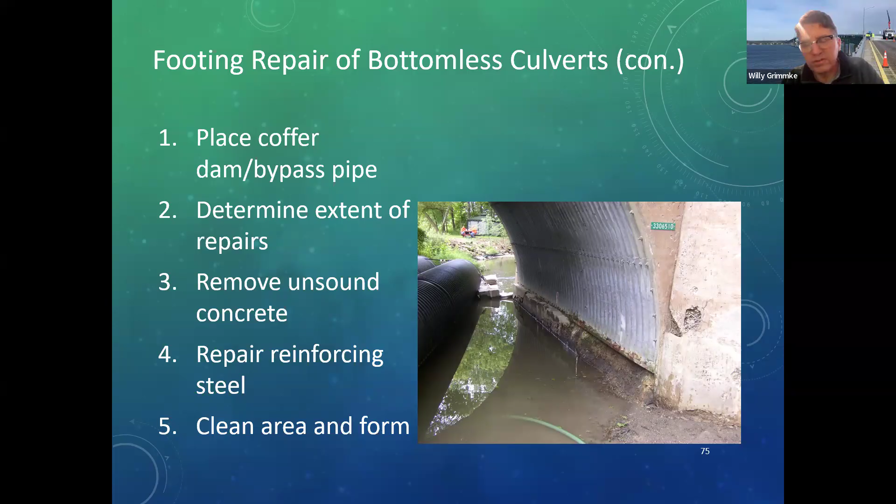So here's one where the corrugated metal arch is just fine, there's nothing really wrong with it. A little bit of corrosion on the channel that's supporting it, but the concrete is not good. So you have to do a bypass. This was as the bypass was being set up, everything was going to be diverted through these polyethylene pipes.

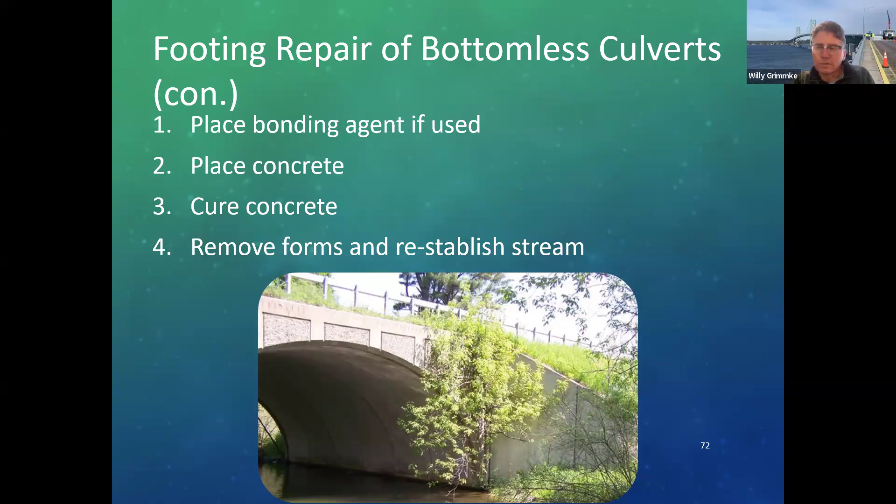Then removing all the unsound concrete, repairing or replacing reinforcing steel, cleaning and pouring. If you're dealing with concrete repairs, you may or may not use a bonding agent, depending on what your practice is. Place and cure concrete, and then get the forms out of there and restore your flow. So we have discussed common deficiencies.

We have described PM, and we have reviewed repair methods. So we've got a few questions. Corrosion in metal pipes can lead to which of the following deficiencies? Invert damage, deformation, undermining, or all of the above?

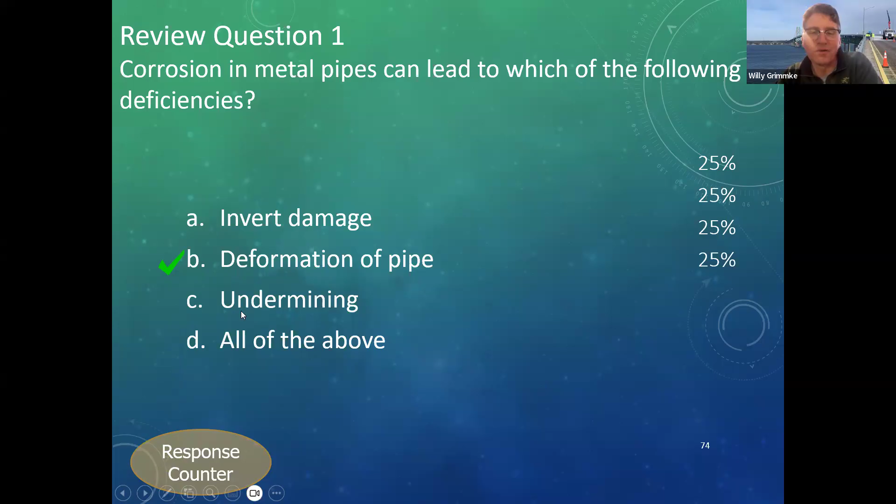We have people answering, and there's a couple people saying invert damage, but mostly everyone is saying all of the above. So let's see. The answer we're looking for is actually all of the above. Corrosion can lead to everything. I don't know why that check mark came up.

Question 2. What would be a PM method for prevention of scour? Riprap or concrete apron, toe or cutoff wall, slip lining or cured in place, installation of geosynthetic composite mat or armor plate, A and B only, or all of the above?

Answers are coming in. We have about 70% of the people saying A and B only, about 30% saying all of the above. We are looking for A and B only, because the riprap and concrete apron, toe or cutoff wall will prevent that. Slip lining or armor plate could potentially increase velocities through the culvert in and out, which could possibly exacerbate any scour. Increasing velocities could increase scour potential. So A and B only is what we were looking for.

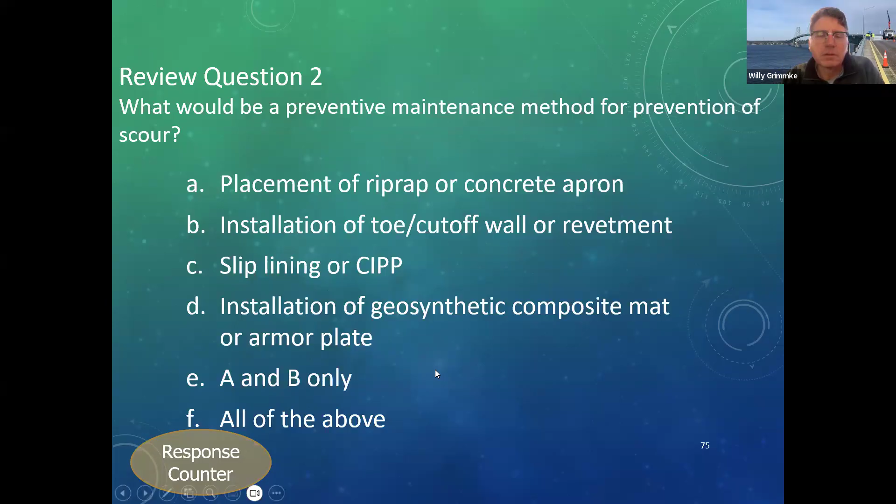Now, which is not a viable method of lining a culvert with significant deformations? Cured in place, shotcrete, slip lining, or none of the above.

It looks like, let me just end the poll, and share the results with you. So what we're looking for is slip lining. This question I probably should reword, to say more than minimal deformations rather than significant, because if it has truly significant deformations, you may want to give a hard look at replacing. But if you have deformations that are big enough to make slip lining infeasible, shotcrete or cured in place would be the way to go.

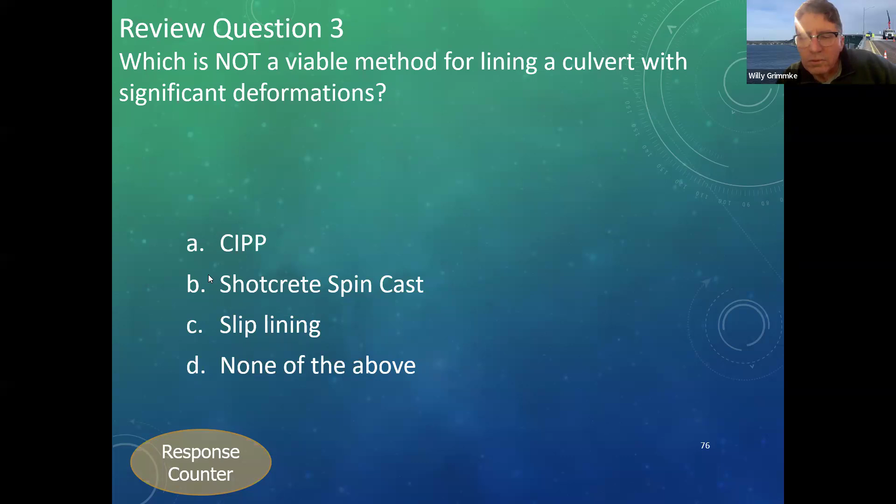Any questions? And that concludes my discussion of keeping culverts well. I want to thank everyone for joining and participating. Willy, we have two questions.

One looks like a comment that says the cured in place can be UV cured rather than heat cured, which is true. There are brands that do that.

You have a picture that someone wanted to know why the last structure was a culvert rather than a bridge. Because it was less than 20 feet, which is a culvert by federal definition, but not necessarily state case law definition. And also by the behavioral definition, it's not a bridge strictly speaking with abutments, and it could be submerged. And that, to me, is the more important thing, the engineering characteristics.